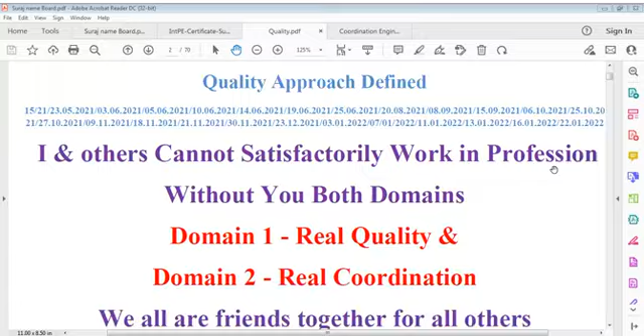So we have to be realistic about this issue, how to deal with that, and we have to deal with quality along with the quality system. We cannot simply say that we keep quality requirement or deliver quality in isolation of the system, and quality of system and product quality both must move together.

We have to rethink, we have to redecide, we have to consider value and quality of product rather than exclusively system quality. A quality system is audited, it is done, but it doesn't prove anything.

To be very frank, it may be whatever, ISO 9000 or Six Sigma or what. If you can't deliver a product, that means there is a fake system, or the persons involved are fake.

I don't blame a particular person, but that point cannot be ignored. The person is fake. Why is that person fake? Because that person is least bothered.

Everybody wants its own way, but what is required is we have to do the work according to whatever is demanded or instructed in the form of specifications or designs. If we can't do that, it means we are not professional or we don't care.

When we say professional, it's a very important word. What I understand is profession means it's a kind of work religion. I consider profession as work religion, not worship religion. It should be treated at that level - it is logical, it is based on facts, it is based on trust, it's based on commitment.

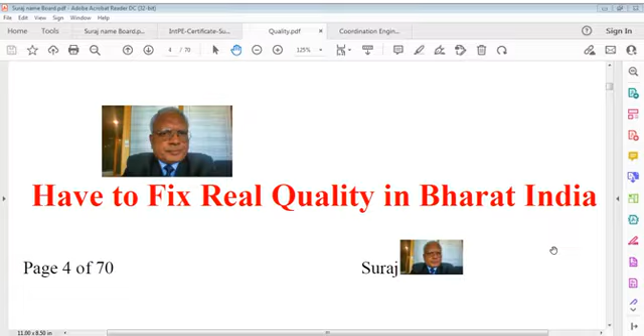So this means we have to consider all this very frequently and very efficiently, and we have to think of how to fix real quality in our country. Come what may, we have no excuses. We can't give any excuse on that. Quality is a requirement and requirement is a mandate. We have to apply it, we have to do it. There is no way we can say, give me concession this time, next time I will let you know. That's not acceptable, because engineering is based on facts and not on fictions.

This is the difference. Engineering is factual, it is real, and then this is delivered, and that delivered product performs. And if it doesn't perform, that project is no product, it's scrap. We say work quality can't be compromised, no way, we can't even think of that. Why to compromise when money is spent, time is spent, and we can apply quality? Why to compromise with that?

That's what is difficult, and we don't depend on a fragile system only. Maybe it is a good system, sound system, but the product should speak - that's what we can say when product speaks. This is a speaking system, speaking quality system or real quality system. Quality system may fail, but product must be delivered qualitatively, and if that is possible, that's the best way, because we can't rely only on a system, because we prepare that system.

Maybe I'm not experienced that much, or we don't have that problem exposure. And we have so many stoppages on the way, so many checkpoints on that, and there are so many existing red lines to be resolved, and we have to resolve them.

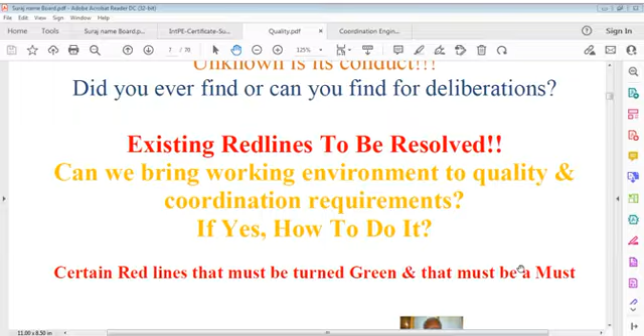Can we bring the working environment to quality and coordination requirement? And how to do that - we have red lines that must be turned green, and many other countries are working around. We have to be better than that, but unfortunately we are the worst. And I'm blaming everyone on this, because we don't have any mindset to be very strongly committed to quality, and that is our weakness.

While other countries are doing that, we can't do that. We take it for granted, or we think, oh, no, it doesn't matter. No system, no method, no quality follow-up, no individual development. They just go on, and particularly in the construction field, it happens so vaguely. Really, it's sometimes ridiculous why we are working at all.

We have to understand coordination. We have to work on required coordination during activities to achieve the defined or expected quality profile on works. If we can't do that, why should we not revisit the whole system? Why should we not revisit quality requirements and specifications that are needed or essential, and update our knowledge and per world working standards?

Why should we not apply work relational coordination requirements? It's a must we have to think of - it's a reliable solution. We have certainly a worsening state of the quality system, a worsening state of quality of work. On how to improve such mandated work quality to certain minimum required marks - that's important.

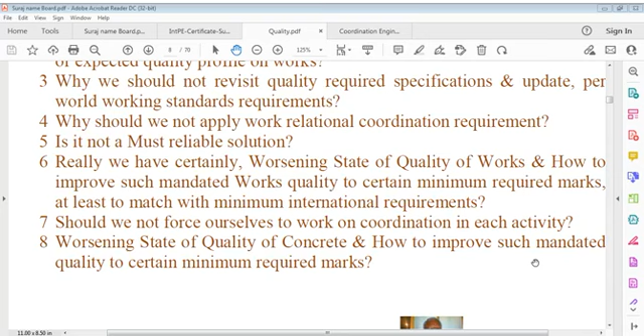Concrete, we say, is a component in construction which amounts to a major percentage of the cost of construction. It becomes incumbent on us to care about the quality of such a component, and that's a very important part. We'll come back to this again because I don't want to waste time on this.

We have a coordination issue. Coordination in engineering is very important for the public as well as for engineers, because it keeps everybody thinking about coordination. If you don't have complete information, there is no way coordination can be done, because coordination has no academic level. It's a practical aspect, it's the practical world of engineering where coordination is learned and taught. And that's the important point.

It means we are a scientific country, or we should be a scientific country. Both are different situations, and we have been missing. We have been missing coordination, and we have been missing good engineering, and that's what we have to think about. And if we can think, I think that's a better way. And there were so many questions I put in. Is coordination engineering a must on every project? We should ask ourselves. And project means what? It's all performance activities involved from pre-design to final completion of construction.

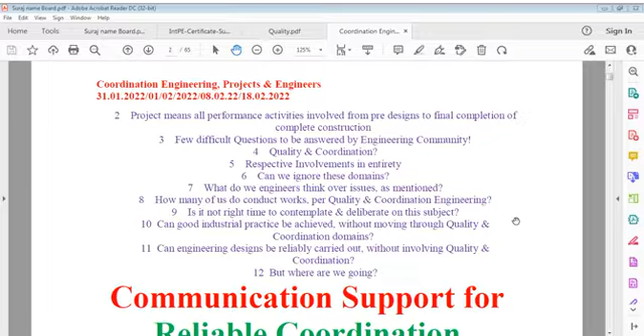There may be some questions to be answered by the engineering community regarding quality and coordination and respective involvement in its entirety. Can we ignore these domains? That's the point we have to answer to ourselves. Can we ignore these two domains? The first domain is quality and the second domain is coordination. Can we ignore them? How many of us conduct work for quality and coordination engineering? Everybody may claim it, but really prove that you work accordingly. That's an important point.

Is it not the right time to contemplate and deliberate on this subject. It's what we're doing, but I'm doing it alone. Nobody is raising any questions so far. And can good industrial practice be achieved without moving through quality and coordination domains? Can engineering design be reliably carried out without involving quality and coordination? And where are we going? There are some projects which I'll look at later on.

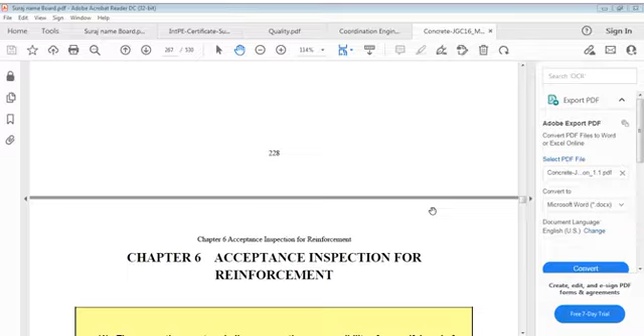Now I open this file on concrete which you're waiting for. That file is a very important one, in which I found the specification. I'll look at it now to see what we did last time, and we'll go there to see the results. Last time we were somewhere here. It was acceptance inspection for reinforcement, and before that, yes, acceptance inspection of concrete. That's what we said, inspection of concrete. And we did all this, and we discussed the commentary, and we discussed what slump is.

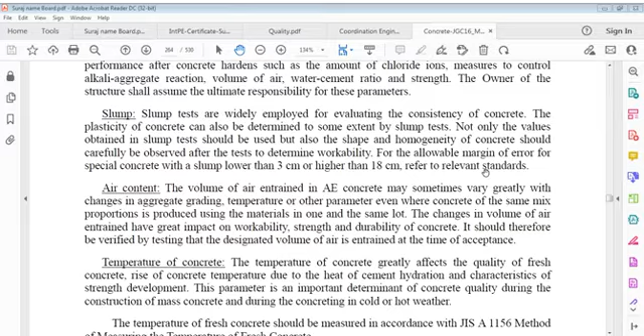Chloride ion content; we start with mass of unit volume. We start with chloride. We discuss it again just for refreshing purposes. Chloride ion concentration greatly affects the resistance to steel corrosion. In cases where a large number of chloride ions are highly likely to intrude into concrete, in cases where sea sand is used, the frequency of testing shall be increased. That's what it says: chloride ion concentration greatly affects that.

What is the temperature now? I don't know what the temperature is. I'm feeling a little cold.

This is the temperature I think is coming. It's now, it says 25 degrees. Indoors should be less than that, and I think that's what it is. 25 degrees, I'm feeling cold. Maybe 10 degrees inside, maybe 20 degrees. So I feel, of course, I should keep my fan off. That will be better, I think, this way. And we have to be serious about this issue.

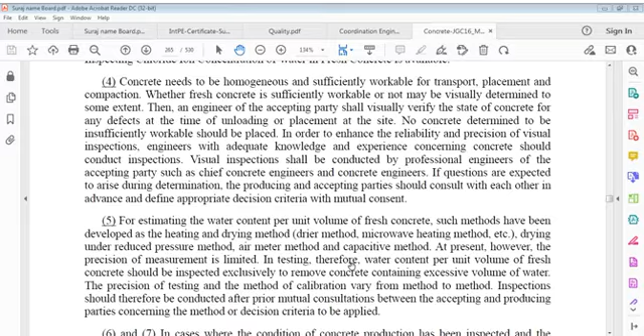For estimating water content per unit volume of fresh concrete, such methods have been developed as heating and drying method, drier method, microwave heating method, drying under reduced pressure method, air meter method and capacitive method. However, precision of measurement is limited. In testing, the water content per unit volume of fresh concrete should be inspected exclusively to remove concrete containing excessive volume of water.

Precision of testing and method of calibration vary from method to method. Inspections should therefore be conducted after prior mutual consultations between parties, engineer and contractor, you may say. In cases where the condition of concrete production has been inspected and quality of concrete materials have been inspected for acceptance, concrete mix proportions may be verified based on printed records of measurements.

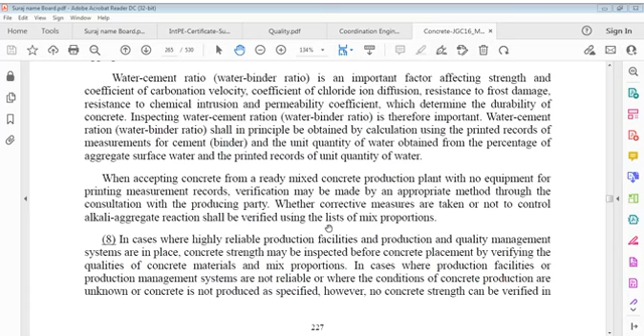In cases where highly reliable production facilities and production and quality management systems are in place, concrete strength may be inspected before concrete placement by verifying qualities of concrete materials and mix proportion. In cases where production facilities or systems are not reliable, or where conditions of concrete production are unknown, or concrete is not produced as specified, however, no concrete strength can be verified in mix proportion inspection. In that case, verification shall be made by strength test after concrete placement.

Shrinkage strain should be measured in accordance with whatever requirements. It should be verified that the measurement does not exceed shrinkage strain of 1000 micrometer.

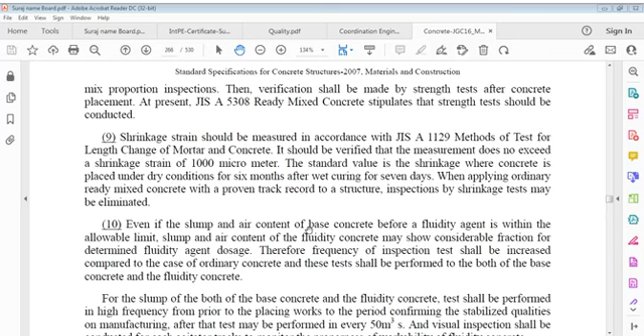Standard value is shrinkage where concrete is placed under dry conditions for 6 months after wet curing for 7 days. When applying ordinary ready-mix concrete with a proven track record to a structure, inspections by shrinkage tests may be eliminated.

Even if slump and air content of base concrete before a fluidity agent is within allowable limit, slump and air content of fluid concrete may show considerable fraction for determined fluidity agent doses. Therefore, frequency of inspection shall be increased compared to case of ordinary concrete, and these tests performed to both of these base concrete and fluidity concrete.

For slump of both base concrete and fluidity concrete, tests should be performed at high frequency from prior to placing works to the period confirming stabilized qualities on manufacturing. After that, tests may be performed every 50 cubic meters, and visual inspection shall be conducted for each agitator truck to monitor properness of workability of fluidity concrete.

It's no doubt that concrete judged not to be in conformity with requirements on results of acceptance test inspection must not be placed. If concrete was already placed into the structure, inspection as of structural concrete must be performed.

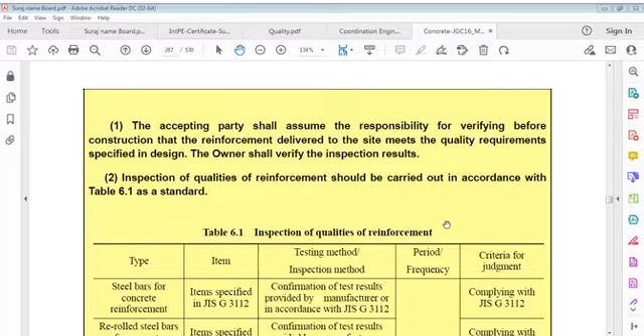Acceptance inspection for reinforcement. The accepting party shall assume responsibility for verifying before construction that reinforcement delivered to site meets quality requirements specified in design. There are steel bar types, then item, testing method, and frequency and period. All of these are generally confirmation of test results provided by manufacturers.

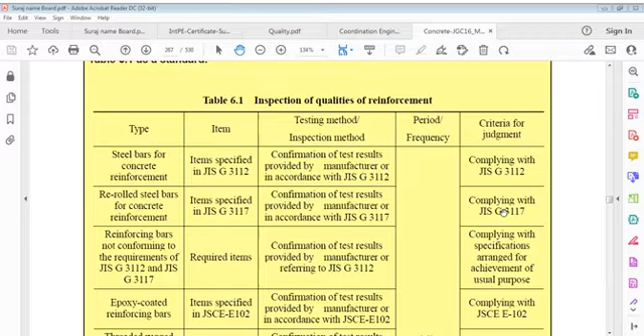Items are steel bars for concrete reinforcement, confirmation of test results provided by manufacturer, and re-rolled steel bars, same applies here. Also reinforcing bars not conforming to requirements, confirmation of test results provided by manufacturer, and epoxy coated reinforcing bars, the same way, and threaded ribbed reinforcing bars with large diameter.

Also pre-stressing wire, pre-stressing strands, pre-stressing bars and pre-stressing steel not conforming to requirements, and rolled steel for general structures, confirmation by manufacturer, rolled steel for welded structures, rolled steel for building structures, as well as steel for structures not conforming to requirements.

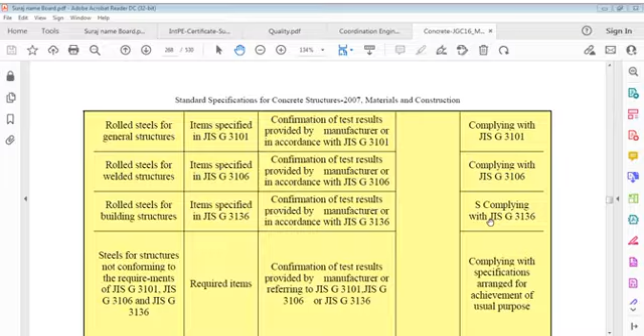Likewise, it is only right and proper that reinforcement possesses required quality as specified for design of structure. Inspection to ensure quality of reinforcement should be performed prior to placing works in advance. The contractor assumes responsibility for conducting acceptance tests. The owner shall verify results.

Reinforcement shipment is generally made to fields directly from factories in form of bundle with manufacturer's certified mill sheet where name or abbreviation of manufacturer, name and type of reinforcement are legibly identified. General inspection should be performed by confirming by visual observation that description and kind are adapted to prescribed reinforcement, and that material properties, shape, size and weight of reinforcement conform to specifications by examining the mill sheet from the product company.

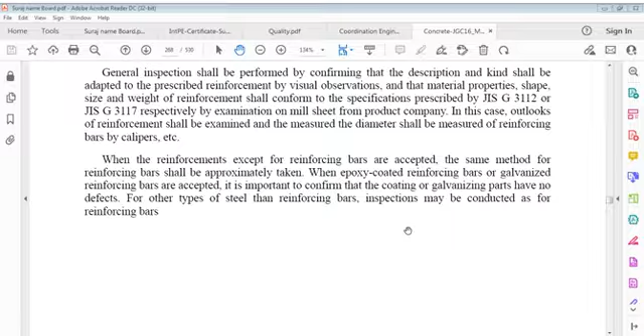In case outlooks of reinforcement are examined, diameter should be measured with calipers. When reinforcements except for reinforcing bars are accepted, the same method as for reinforcing bars should be approximately taken. When epoxy coated reinforcing bars or galvanized reinforcing bars are accepted, it's important to confirm that coating or galvanizing parts have no defects.

For other types of steel than reinforcing bars, inspections may be conducted as for reinforcing bars. Inspection of construction.

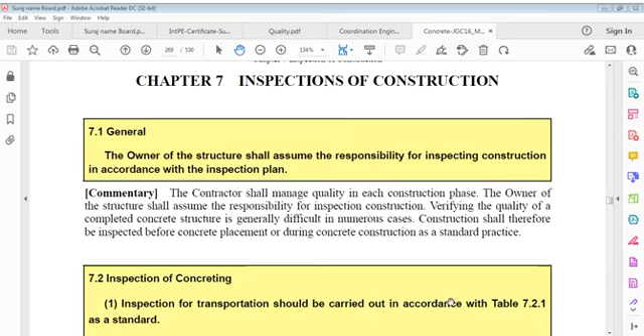The accepting party shall assume responsibility for inspection. We are saying engineer in place of owner because the engineer works on behalf of owner and is responsible on behalf of owner. Here we say engineer as though we say owner, and owner is the owner of responsibility. Contractor shall manage quality in each construction phase.

Owner of a structure shall assume responsibility for inspection and shall verify quality of complete structure. It's difficult in numerous cases. Construction shall therefore be inspected before concrete placement or during concrete construction as standard practice. Inspection for transportation should be carried out. Let us see what it says.

Item is equipment and workers required for transportation, per construction plan, with confirmation by visual observation, because it is transportation, method of transportation, and we have to follow construction plan in every case. Quantity of transportation, confirmation of quantity as prescribed, and all these items regarding method of transportation and quantity, prior to placing work and during transport.

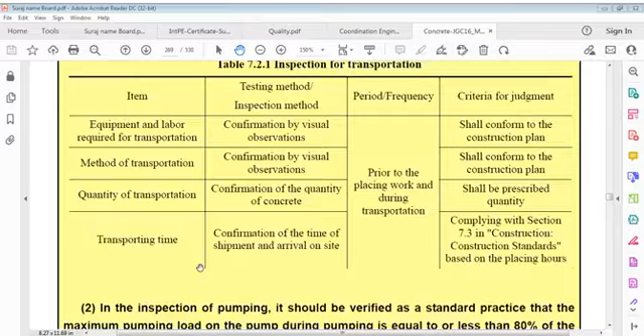Transportation time, confirmation of time of shipment and arrival on site. That is construction standards based on placing. In inspection of pumping, it should be verified as a standard practice that maximum pumping load on pump during pumping is equal to or less than 80% of maximum theoretical pumping.

Now, inspection of casting, that is equipment and workers required, method of placement and quantity of placement. Confirmation by visual observation, shape and size, that is quantity of placement, confirmation of quantity from shape and size of placing zone, and all shall be done according to construction plan and quantity.

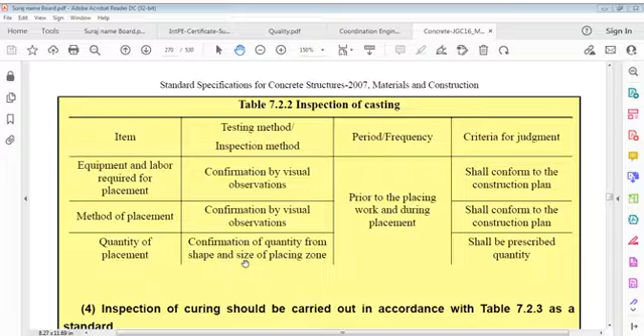Inspection of curing should be carried out in accordance, and this should be same equipment and workers, equipment and labor, method of curing and period of curing. All we have to say, which says equipment and labor requirements observation, and again we say construction plan, we should have ultimately this plan. In cases where inspection for transportation, placing or curing of concrete before construction shows non-compliance with required standards,

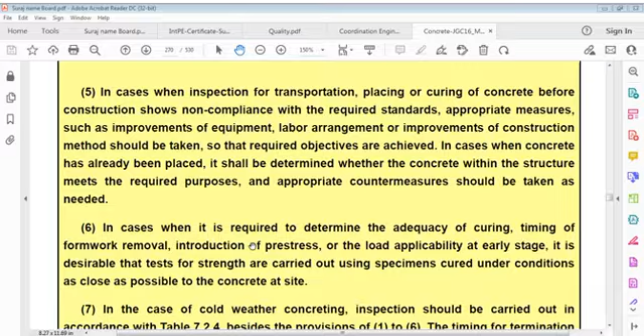appropriate measures such as improvements of equipment, worker arrangement, or improvements of construction method should be taken so that required objectives are achieved. In cases when concrete has already been placed, it shall be determined whether concrete within structure meets required purpose, and appropriate countermeasures should be taken.

In cases where it is required to determine adequacy of curing, timing of formwork removal, introduction of pre-stress, or load applicability at early stage, it's desirable that tests for strength are carried out using specimens cured under conditions as close as possible to site conditions.

In case of cold weather, inspection should be carried out in accordance with requirements. Timing of termination of curing, formwork removal and shoring should be determined on basis of strength of specimen cured under conditions as close as possible to site conditions, or on basis of strength estimated using records of temperature of the concrete. And now site inspection of cold weather concrete: it says circumferential temperature, concrete temperature, and concrete temperature curing.

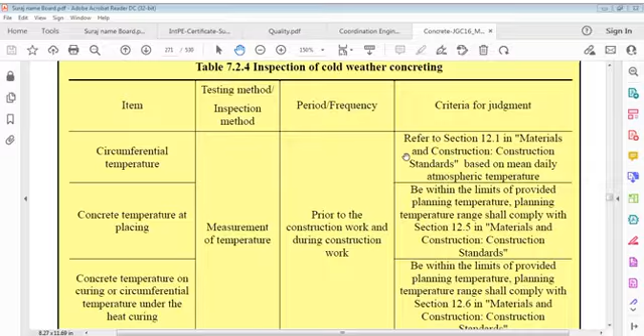So we have to do all this according to standards, and we go to inspection of hot weather concrete. Inspection of hot weather concrete is circumferential temperature, concrete temperature, placing and transportation time. All these have been discussed, and we have gone through. Let's discuss circumferential temperature and concrete temperature. Placing is a measurement of temperature, and that's prior to construction work.

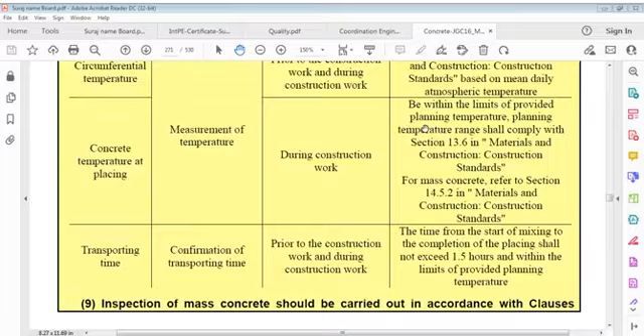During construction, we can say concrete temperature placing. We have to see material, construction, and limits are provided by temperature. It's very important where the limits are that's required here. Transporting time: confirmation of transporting time prior to construction work and during construction work. Time from start of mixing to completion of placing shall not exceed 1.5 hours, and within a limit of provided planning.

Inspection of mass concrete should be carried out in accordance with this clause. For mass concrete, temperature and placing is very important. It says measurement of temperature and frequency during construction work shall comply with the requirements of provided plan. Concrete temperature on curing and circumferential temperature under temperature control curing.

In inspections of concrete transport and placement, types, models, capacities and quantities of transport and placement facilities, human resources assigned, transport channels to site, methods of transport at site, sections of concrete placement, locations of construction joints, and order and speed of placement shall be verified for compliance with construction plan.

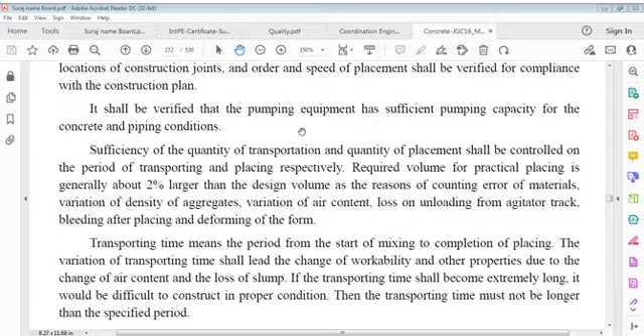It should be verified that pumping equipment has sufficient pumping capacity for concrete and piping condition. Sufficiency of quantity of transportation and quantity of placement should be controlled on period of transporting and placing respectively. Required volume for practical placing is generally about 2% larger than design volume for reasons of counting error of materials, variation of density of aggregates, variation of air content, loss on unloading from agitator truck, bleeding after placing and deforming of form.

Transporting time means period from start of mixing to completion of placing. Variation of temperature and variation of transporting time lead to change of workability and other properties due to change of air content and loss of slump. If transportation time becomes extremely long, it will be difficult to construct in proper condition.

Transportation time means the period from start of mixing to completion of placing. Variation of transportation time leads to change of workability and other properties due to change of air content and loss of slump. If transporting time becomes extremely long, it would be difficult to construct in proper condition. Transporting time must not be longer than specified.

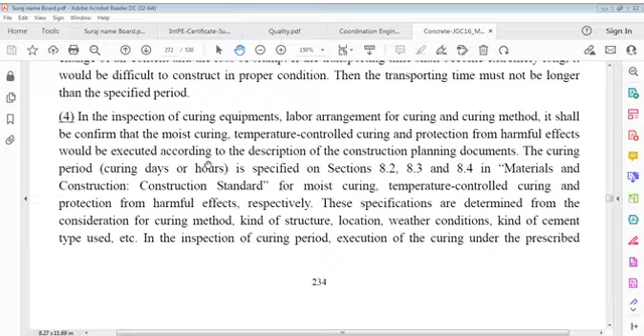Curing period in materials and construction standards for moist curing, temperature control curing and protection from harmful effects respectively. These specifications are determined from consideration for curing method, kind of structure, location, weather conditions, kind of cement, types used. For curing, inspection of curing period, execution of curing under prescribed condition would be confirmed.

In cases where concrete is found to be unacceptable as a result of inspection of transport, placement and curing facilities and construction plan are considered unsatisfactory, facilities should be improved and construction plan should be reviewed. In cases where structure has been completed, it should be verified that structure meets designated performance requirements. Inspection should be conducted during construction and improvement should be made immediately. Measures as preventive as possible should be taken.

In order to estimate adequacy of curing, appropriate time for form removal and pre-stressing or to ensure safety of structure under working conditions, real concrete strength in structure must be estimated in some cases. For this purpose, concrete test specimen shall be cured under conditions as close to field conditions as possible. In cold weather concrete works the above mentioned specification is extremely important.

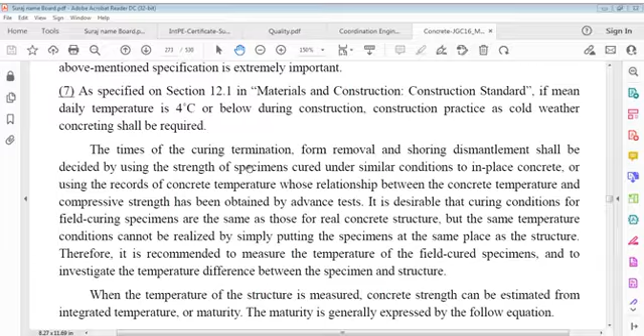In materials and construction standards, if mean daily temperature is 4 degrees Celsius or below, during construction practice, cold weather concreting shall be required. Times of curing termination, form removal and shoring dismantling shall be decided by using strength of specimen cured under similar conditions to in place concrete, or using record of concrete temperature whose relationship between concrete temperature and compressive strength has been obtained.

It is desirable that curing conditions for field curing a specimen are the same as those for the real concrete structure, but the same temperature conditions cannot be realized by simply putting the specimen at the same time at the same place as the structure. It is recommended to measure temperature of field cured specimen and to investigate temperature difference between specimen and structure.

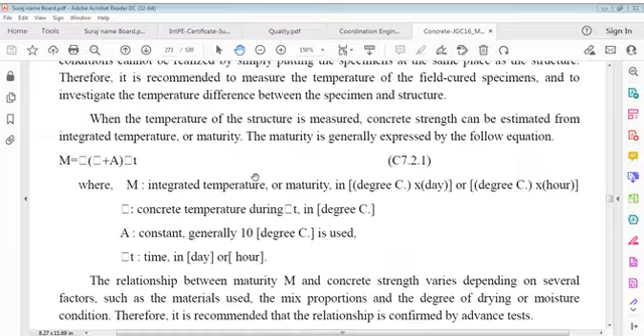So we have this equation. We also discussed this integrated temperature. All this we have gone through. Relationship between maturity M and concrete strength varies depending on several factors such as material used, mix proportion and degree of drying or moisture conditions. Now what to do? That relationship is confirmed by advance tests.

Concrete considered as hot weather is prescribed, considered as cold weather, mass concreting also there. We have the principle of reliable thermal cracking control in mass concrete. The principle of reliable thermal cracking control in mass concrete is to evaluate temperature or thermal stress of structure in advance.

However, in actual practice, due to complicated influence of many uncertain factors at construction stages, behavior of structure may often differ from prediction, no matter how detailed tests or advanced analysis are conducted at planning stage. In mass concreting, it is necessary to measure concrete temperature of structure continuously from time of placing to time when temperature of concrete becomes nearly equal to atmospheric temperature, and examine whether temperature changes are kept within range predicted in advance.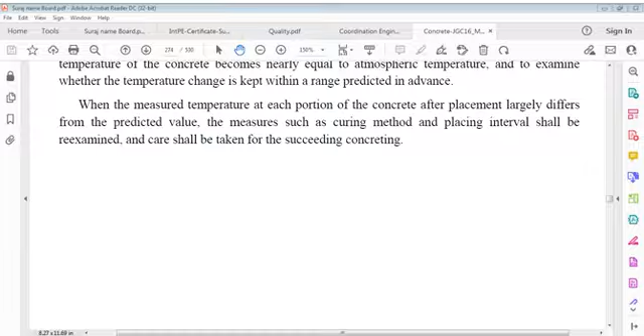Now we go to inspection of reinforcement. Inspection of fabrication and assembly of reinforcement we have to discuss. When inspection results reveal that fabrication and assembly of reinforcement parts are not in conformity with requirement, works for fabrication and assembly of reinforcement parts shall be modified. Items, testing method or inspection method, period you can see, and criteria for judgment.

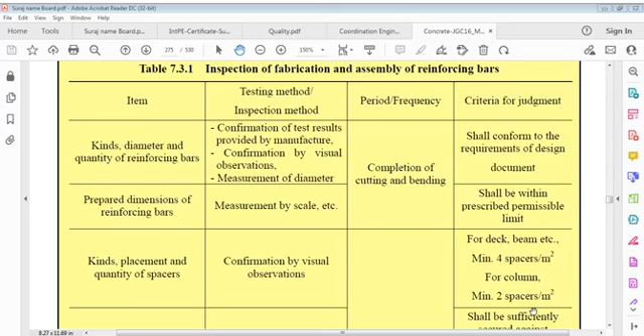Item is kinds, diameter and quantity of reinforcing bars. Other is prepared dimension of reinforcing bars. Kinds, placement and quantity of spacers and fixing method of arrangements of bars. Kinds, diameter and quantity: confirmation of test results and by visual observation. Then measurement by scale for prepared dimensions and confirmation by visual observation.

And here is completion of cutting and bending, specifying diameter, and all should conform to designs' prescribed limits. Or, as we said, 4 spacers per square meter, and this is what we have to think about.

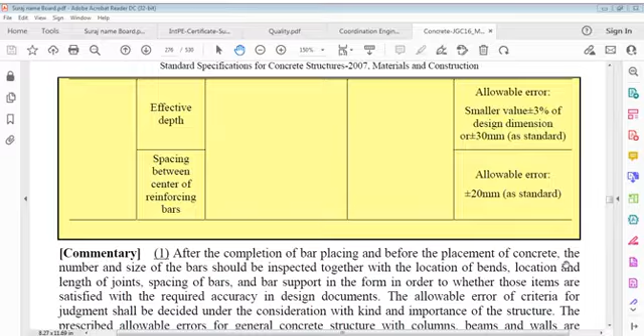Arrangement of assembled reinforcing bars, that is arrangement and length of joint and anchorage, and concrete cover, must conform to design requirements. Cover must be verified for durability. Effective depth has an allowable error of plus minus 3% of design dimensions.

Spacing between centers of reinforcing bars has an error of plus minus 20 mm. After completion of bar placing and before placement of concrete, the number and size of bars should be inspected, together with location of bends, location of length of joints, and spacing accuracy as shown in design documents. Allowable error criteria for judgment shall be decided considering the kind and importance of structure.

Prescribed allowable errors for general concrete structures with columns, beams, and walls are expressed. It is advisable to make as many inspections as possible during placing of reinforcing bars.

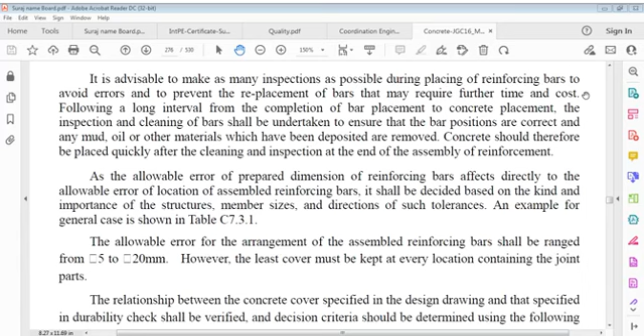Allowable error for arrangement of assembled reinforcing bars shall be from 5 to 20 mm. However, the least cover must be maintained at every location, including joint parts. The relationship between concrete cover specified in drawings and that specified in the durability check shall be verified, with decision criteria determined using the equation: measured concrete cover (cm) must be greater than specified concrete cover (cd).

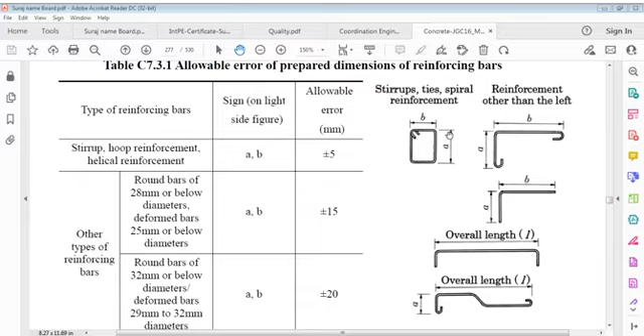This we had discussed now - allowable error in prepared dimensions, which we also discussed. Allowable error in prepared dimensions of reinforcing bars, such as stirrups and hoops, is plus minus 5 mm. For round bars 28 mm or below diameter, and deformed bars 25 mm or below diameter, the error is plus minus 15 mm.

When inspection results judge that preparation and assembly of reinforcing bars was not in conformity with requirements, it shall be modified properly. For bent reinforcing bars, rebending shall not be undertaken in principle, as it may harm the quality of the bars.

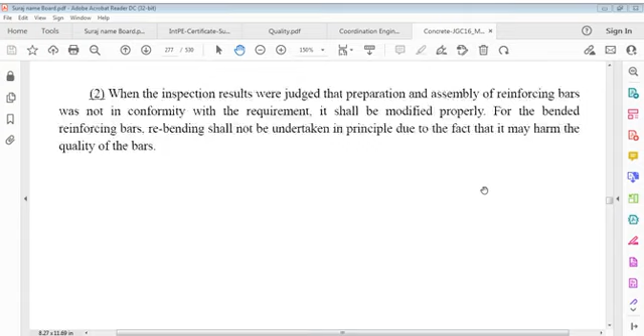Inspection of joints of reinforcing bars. When connecting reinforcing bars using gas welded joints, welding joints, or mechanical joints, the strength of the joint should be examined before use. Inspection of joints of reinforcing bars should be carried out in accordance with the table.

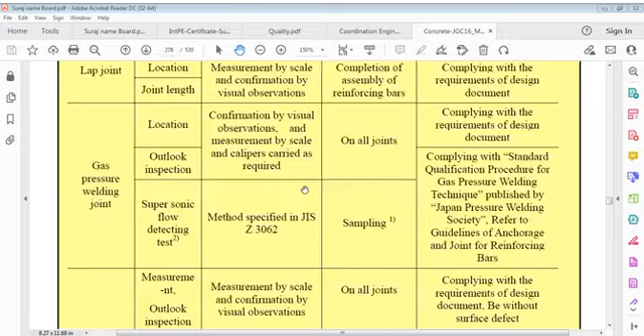Guidelines of anchorage and butt arc welded joints: measurement, outlook inspection, detailed outlook inspection, measured by scale or confirmation with calipers and others, on all joints, more than 5% sampling, complying with requirements of design, without surface defects, eccentricity not more than 1/10 of bar diameter.

Eccentricity not more than 1/10 of bar diameter. Slope of joint parts not more than 1/10 of measured length.

For details of guidelines of anchorage and joint of bars, the supersonic flow detecting test method specifies more than 20%, more than 30% samples, following guidelines for anchorage and joint.

Mechanical joint inspection tests shall be executed with consideration given to the type of joint method. One inspection lot is assumed with pressure welding parts from the same working party.

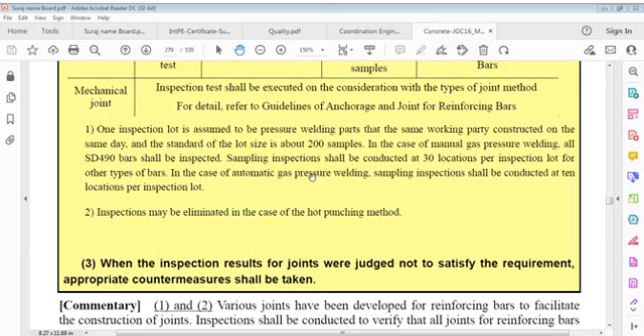Inspections may be eliminated in case of hot punching method. When inspection results for joints were judged not to satisfy requirements, appropriate measures shall be taken. Various joints have been developed for reinforcing bars to facilitate construction of joints.

Inspections shall be conducted to verify that all joints for reinforcing bars meet designated performance requirements. Gas welding joints include manually gas welded joints, automatically gas welded joints, and hot punching gas welded joints. Welded joints include butt arc welded joints, stud welded joints, butt resistance welded joints, and flare welded joints. Mechanical joints include crimped sleeve joints, threaded joints, threaded deformed bar joints, mortar grouted joints, friction welded joints, and other types of joints.

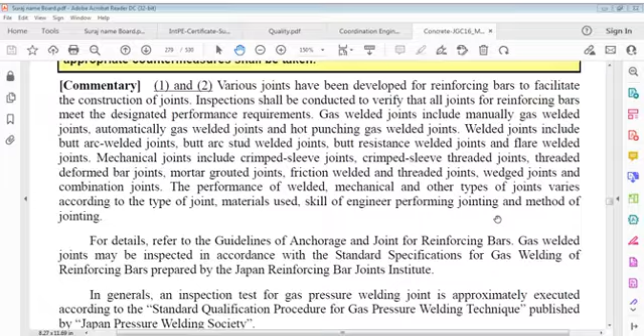In general, inspection tests for gas pressure welding are executed approximately as described. When judgment does not comply with the specifications, measures shall be performed according to recommendations by the standard qualification.

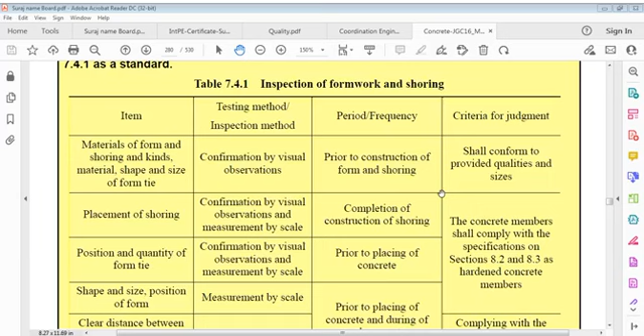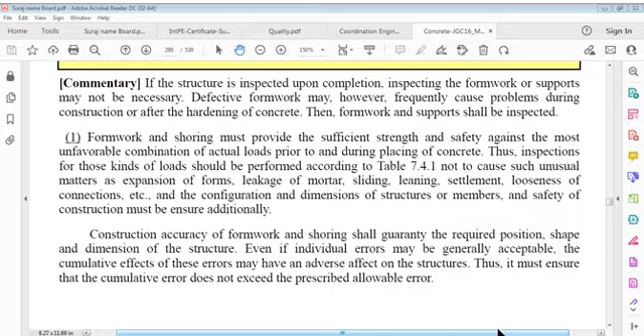If a structure is inspected upon completion, inspecting formwork or support may not be necessary. Defective formwork may, however, frequently cause problems. During construction or after hardening of concrete, formwork and support shall be inspected.

Formwork and shoring must provide sufficient strength and safety against the most unfavorable combination of actual loads prior to and during placing of concrete. Thus, inspections for those kinds of loads should be performed so as not to cause such unusual matters as expansion of forms, leakage of mortar, sliding, leaning, settlement, looseness of connection, etc.

The inspections for those kinds of loads should be performed not to cause such unusual matters as expansion of forms, leakage of mortar, sliding, leaning, settlement, looseness of connections, and changes in configuration dimensions of structure or members. Safety of construction must be ensured.

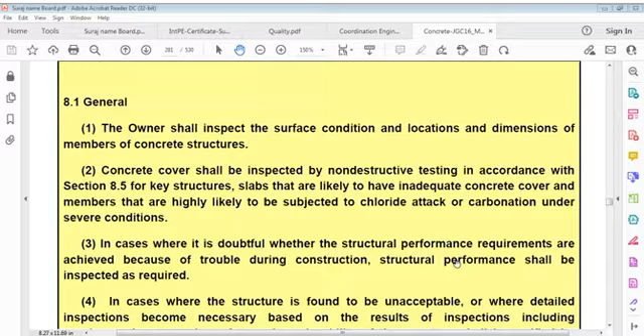Concrete cover shall be inspected by non-destructive test methods we discussed, as slabs are likely to have inadequate concrete cover in members highly likely to be subjected to chloride attacks. Inspection is also required when it is doubtful whether structural performance requirements are achieved because of trouble during construction, and in cases where the structure is found to be unacceptable or where detailed inspections become necessary based on results of inspections, including non-destructive testing.

In cases where it is doubtful whether structure performance requirements are achieved because of trouble during construction, structure performance shall be inspected as required. Where structure is found unacceptable, or where detailed inspections become necessary based on results of inspections including non-destructive tests, safety and serviceability of structures shall be verified.

Concrete structure should be constructed as initially planned, within allowable range, if it is to meet designated performance requirements. The owner who accepts it should assume responsibility for conducting inspections to verify whether surface condition is satisfactory, and whether location, shape and dimensions of the structure are within allowable range.

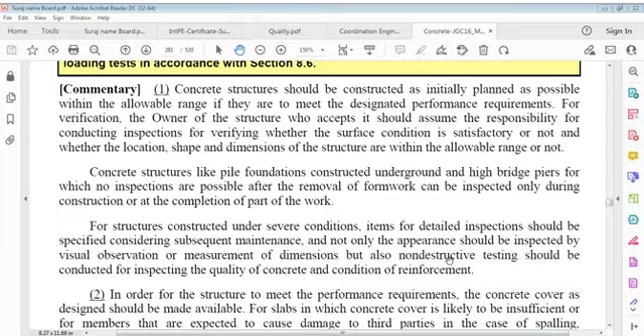Concrete structures like pile foundations constructed underground and high bridge piers, for which no inspection is possible after removal of formwork, can be inspected only during construction. For structures constructed under severe conditions, items for detailed inspections should be specified considering measurement and subsequent maintenance. Not only appearance should be inspected through visual observation or measurement of dimensions, but non-destructive testing should also be conducted for inspecting the quality of concrete.

In order for the structure to meet performance requirements, concrete cover as designed should be made available. For slabs in which concrete cover is likely to be insufficient, or for members expected to cause damage to third parties, or members likely to be subject to steel corrosion due to chloride attack or carbonation, non-destructive testing should be conducted.

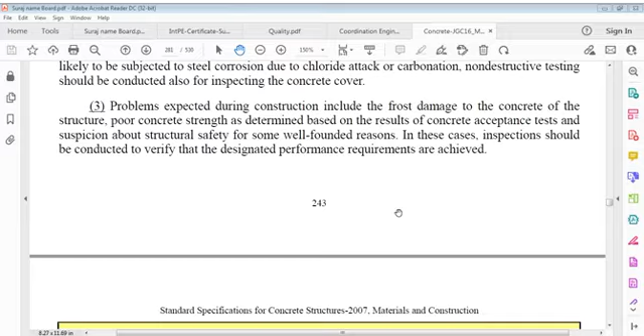Expected issues during construction include frost damage to concrete of the structure, poor concrete strength as determined based on results of concrete acceptance tests, and suspicion of structural safety for some well-founded reasons. In those cases, inspection should be conducted to verify that designated performance requirements are achieved.

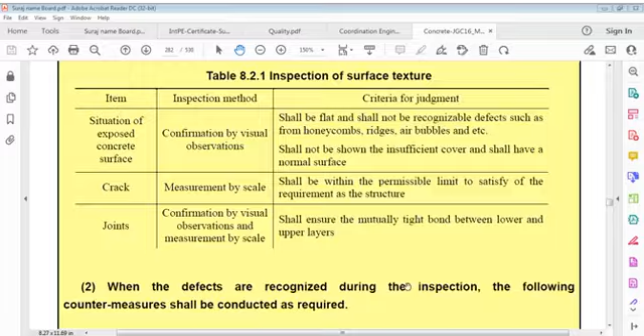When defects are recognized during inspection, countermeasures shall be taken. Defects on the concrete structure surface, such as abrupt bulges and ridges, shall be removed to flatten the surface. Other surface imperfections such as honeycombs and fractured portions shall be removed and repaired. Initial cracks larger than allowed shall be repaired properly.

In the case of mass concrete, besides inspection carried out as stipulated, inspection of thermal cracks shall be conducted by visual observation after removal of formwork. Timing of inspection of thermal cracks shall be decided taking into account temperature change in the structure. When inspection points out harmful cracks, adequate countermeasures shall be taken. When repair is necessary, appropriate measures, materials and methods shall be selected so as to satisfy the requirements of the structure.

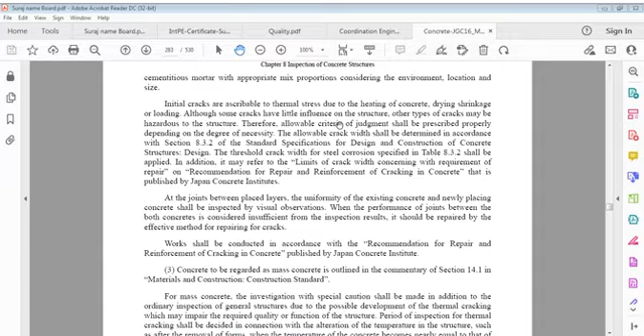So let us continue. I left off somewhere here, and we were talking about inspection of surface texture. Inspection of surface texture shall be performed prior to undertaking measures such as repair or refinishing. We have to either repair or refinish.

It is important to inspect the surface just after removal of formwork and curing. Visual inspection for surface defects such as cold joints, honeycomb, ridges, abrupt bulges, bubbles and different tones of color shall be conducted by visual observation. Also inspected are locations where reinforcing bars have been visibly exposed, or where the shapes of reinforcing bars are clearly recognized due to insufficient concrete cover even before reinforcing bars have been exposed.

Prior to repair, examination of the in-service environment, location and status of defects shall be performed. Repair should be applied while implementing adequate quality system programs so as to eliminate the need for repair in the maintenance phase. Initial cracks arise from thermal stresses due to heating of concrete and drying shrinkage. Although some cracks have little influence on the structure, other types of cracks may be more hazardous to structures than others. Therefore, criteria of judgment shall be prescribed, and allowable crack width shall be determined.

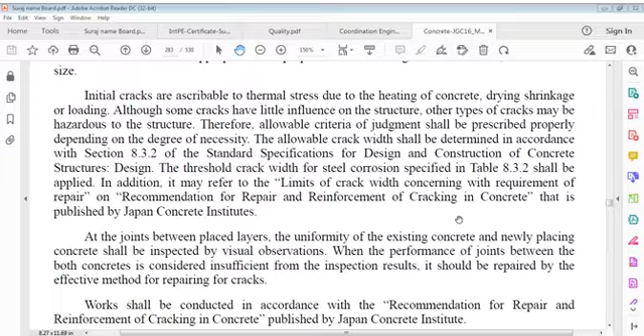And likewise, we have to see all these concrete to be regulated regardless of mass concrete specified herein. Joints between placed layers, and uniformity of existing concrete and newly placed concrete, shall be inspected. Everything has to be inspected upon removal of the shutters. And when performance of the joint between both concretes is considered insufficient from results, it should be repaired.

Mass concrete investigation with special caution shall be conducted in addition to ordinary inspection of general structures due to possible development of thermal cracking, which may impair required quality or function of structures. Period of inspection for thermal cracking shall be decided in connection with alteration of temperature in the structure, such as after removal of forms, when temperature of concrete becomes nearly equal to that of atmosphere, and when average temperature of member becomes lowest during winter.

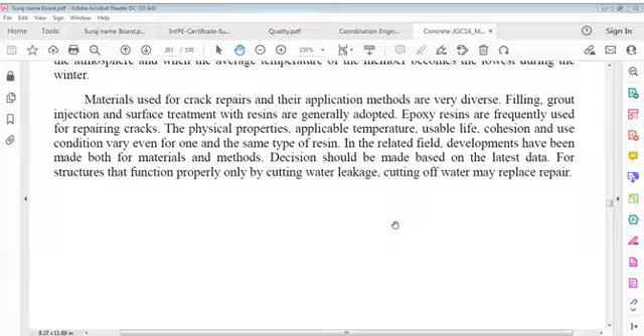Materials used for crack repairs and their application methods are very diverse. Filling, grout injection and surface treatment with resins are generally adopted. Epoxy resins are frequently used for repairing cracks. Physical properties, applicable temperature, usable life, cohesion and use condition vary even for one and the same type of resin. Developments have been made both in materials and methods. Decisions should be made based on latest data. For a structure that functions properly only by cutting water leakage, cutting off water may replace repair.

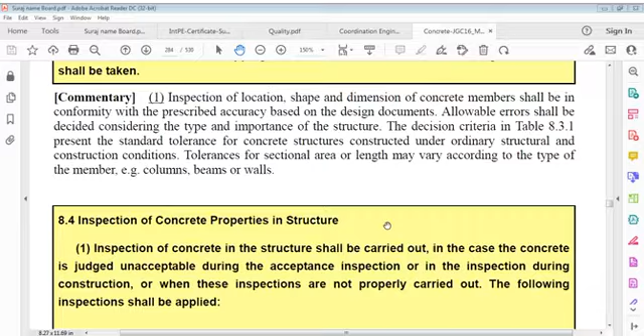Inspections of location and dimension of concrete members: plane position allowable error is plus minus 30 mm, and height in designs 50 mm. We already discussed this. Inspection of location, shape and dimension of concrete members shall be in conformity with prescribed accuracy. Allowable errors shall be decided accordingly, considering types and importance of structures.

Inspection of concrete properties in structures shall be carried out in case of concrete which is unacceptable during acceptance inspection, or inspection during construction when these inspections are not properly carried out. Tests on specimens taken at delivery and subject to same conditions as structures, tests on specimens taken from structures, and non-destructive tests will be applied. In case inspection evokes suspicion of performance of structure, tests shall be conducted to comprehensively judge structural performance from various aspects, combining non-destructive tests, tests on drilled cores or sawn beams, and loading tests on structures.

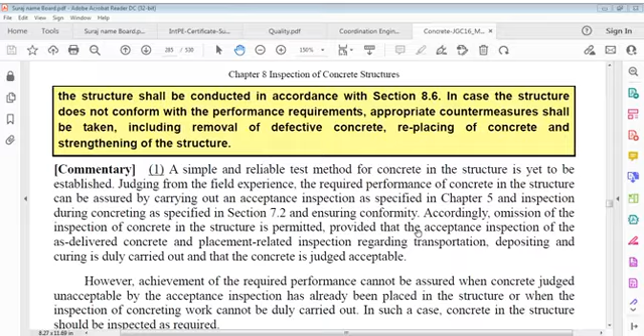Loading tests for safety and serviceability of structures shall be conducted accordingly. In case the structure does not conform with performance requirements, appropriate countermeasures shall be taken, including removal of defective concrete, replacing of concrete, and strengthening of structure. A simple and reliable test method for concrete and structures is to be established. Judging from field experience, required performance of concrete structure can be assured by carrying out acceptance inspection and inspection during concreting as specified, and ensuring conformity accordingly.

Omission of inspection of concrete is permitted provided that acceptance inspection of as-delivered concrete and placement-related inspection regarding transportation, deposition and curing is duly carried out. However, achievement of required performance cannot be assured when unacceptable concrete has already been placed in the structure, or when inspection of concrete work cannot be duly carried out. In such a case, the concrete structure shall be inspected as required.

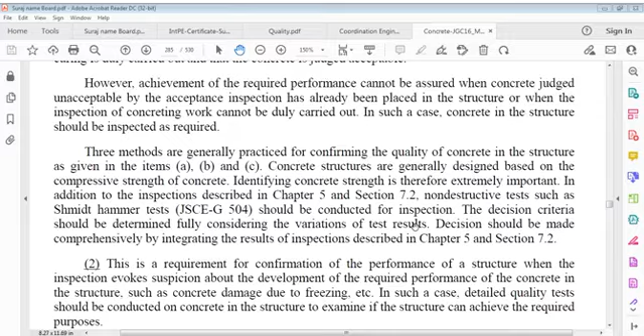Three methods are generally practiced for confirming quality. Concrete structures are generally designed based on compressive strength of concrete. Identifying concrete strength is therefore extremely important. Non-destructive tests such as rebound hammer tests should be conducted for inspection. Decision criteria should be determined fully considering variations of test results. Decisions should be made comprehensively by integrating results of inspections.

This is a requirement for confirmation of performance of the structure, when inspection evokes suspicion about development of required performance of concrete structures, such as concrete damage due to freezing. In such a case, detailed quality tests should be conducted on the concrete structure to examine if the structure can achieve required purposes. Test methods include non-destructive tests such as rebound hammer tests and ultrasonic testing, tests using concrete specimens, cores or beams cut from structure, tests for surface air permeability, tests for estimating concrete mix proportions, and loading tests.

Qualities of concrete in structure may not be accurately judged by a single test method. Multiple tests should be combined to make a comprehensive judgment. When test results indicate performance requirements of structure are not fulfilled, appropriate measures should be taken, including strengthening of structure.

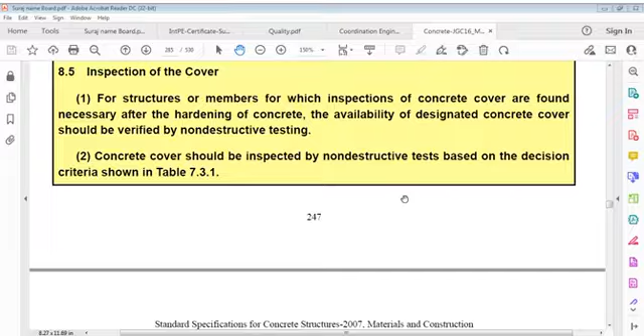Inspection of cover for structures or members of which inspection of cover is found necessary after hardening of concrete: availability of designated concrete cover should be verified by non-destructive testing. If concrete cover is found unacceptable from the results of the inspections, comparison shall be made among such methods as chipping and reconstruction of concrete and application of protective measures. Though cover is investigated at time of inspection of fabricated reinforcement, cover can depend on degree of securing of formwork.

Concrete cover of a completed structure should be measured by such non-destructive testing methods as electromagnetic induction, electromagnetic wave reflection, and radiography for important structural members, members that are likely to be subject to steel corrosion under severe conditions, and members that greatly affect third parties.

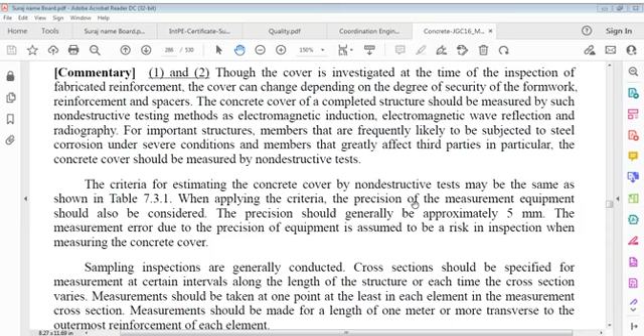Cross-sections should be specified for measurement at certain intervals along the length of the structure, each time the cross-section varies. Measurement should be taken at one point at least in each element in the measurement cross-section. Measurement should be made for a length of 1 meter or more.

For a structure in which concrete cover is found insufficient as a result of sampling inspections, detailed investigation should be done. Insufficient cover reduces performance of concrete to protect steel reinforcement; this requirement was established to ensure performance. Loading tests of members and structure: the important point is the load.

In case where the structure is considered unacceptable in inspections conducted before completion of the structure, or a verification of structural performance is considered necessary because of well-founded suspicion about performance of a structure, performance of the structure should be verified by confirming safety and serviceability of the structure or members by loading tests. Method of loading shall be determined in order to certainly examine required performance.

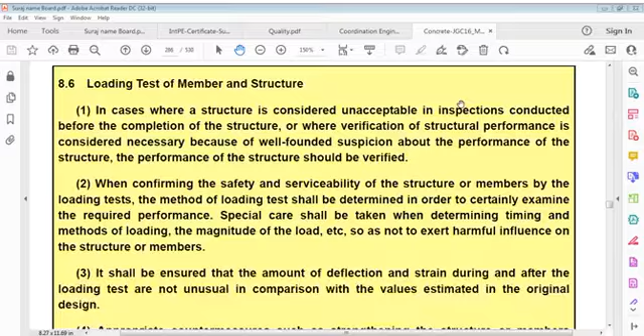Special care should be taken when determining timing and methods of loading, magnitude of load, etc., so as not to exert harmful influence on the structure or members. It shall be ensured that the amount of deflection and strain during and after loading tests are not unusual in comparison with values estimated in the original design.

Appropriate countermeasures such as strengthening of the structure or members shall be taken in case safety and serviceability of the structure or members are probably insufficient. When confirmation by load test shall be performed, it should be considered confirming tests for performance of elements such as members and loading tests of the structure. In application of test results, special attention is required to the fact that performance assessed in loading tests is generally limited to part of elastic behavior.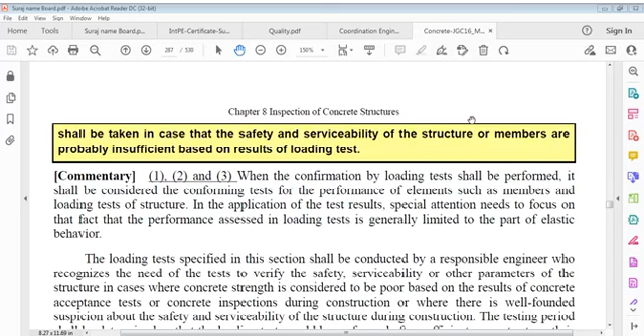Load tests specified in this section shall be conducted by a responsible engineer who recognizes the need of tests to verify safety, serviceability or other parameters of the structure in cases where concrete strength is considered to be poor based on results of concrete acceptance tests or concrete inspections during construction, or where there is well-founded suspicion about safety and serviceability of the structure.

During construction, the testing period shall be determined so that the loading test could be performed after sufficient concrete strength is attained, so that introduction of weak spots on the structure due to early application of load can be avoided. In case a new construction method or special material is adopted during construction of structures, the load test method shall be as prescribed in construction specifications.

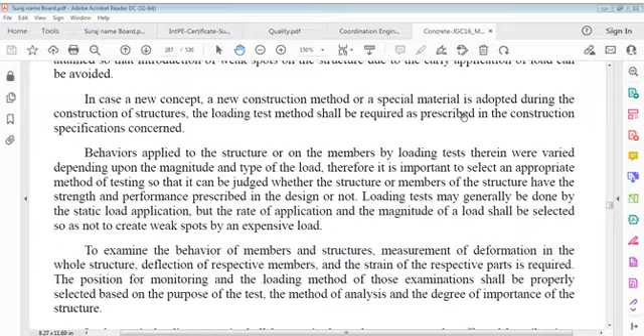Behaviors of the structure or members under loading tests vary depending upon magnitude and type of load. It is important to select an appropriate method of testing so that it can be judged whether the structure or members have the strength and performance prescribed in design or not. Loading tests may generally be done by static load application, but rate of application and magnitude of load shall be selected so as not to create weak spots by an excessive load.

To examine behavior of members and structures, measurement of deformation in the whole structure, deflection of respective members and strain of respective parts is required. Positions for monitoring and load method of those examinations shall be properly selected based on purpose of test, method of analysis and degree of importance of the structure.

In a static loading test, care shall be taken not to be affected by vibration, impact or other dynamic movement. Measurement errors that are largely affected by atmospheric temperature change during the test shall be kept as small as possible, or an adjustment of errors in test results shall be prepared in advance. Cracking that may exert harmful effects on strength and durability of the structure.

Notably large residual deformations or other cracking that may exert harmful effect on strength and durability of the structure, or other defects in the structure, must be carefully observed, not only during but also after the test. In addition, propriety of the test method shall be confirmed together with performance of the structure.

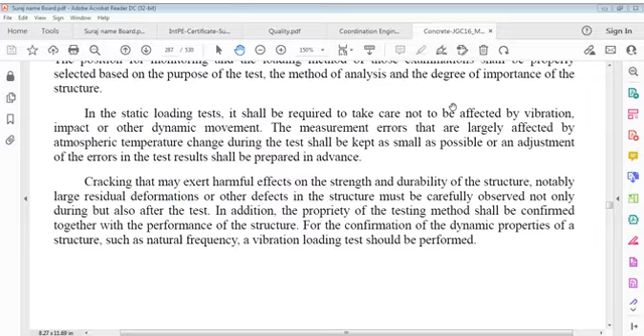For confirmation of dynamic properties of the structure such as natural frequency, a vibration load test should be performed. Records.

Results of inspection of concrete structure shall be organized and stored. Inspection records, if repair, renovation, or other corrective measures are taken based on results of inspection: reasons, locations and range, and materials used shall also be recorded. Results of inspection conducted

Results of inspection conducted before the structure is put into service serve as initial values in inspections. In maintenance of the structure, performance requirements for concrete structures in such terms as durability, safety, serviceability, and restorability should be met throughout its design useful life. Inspection results for concrete structures are important data for identifying initial conditions of the structure for maintenance, preparing inspection and investigation plans, and analyzing progress of alteration.

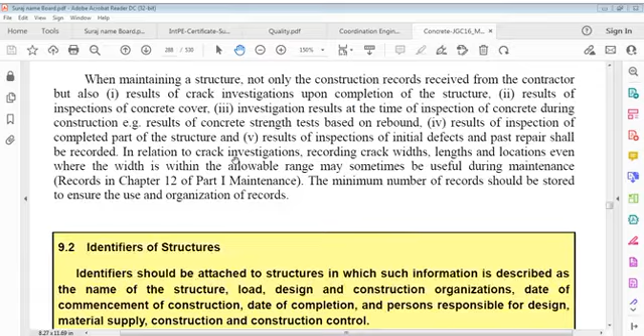When maintaining a structure, not only construction records received from the contractor, but also results of crack investigations upon completion of the structure, results of inspection of concrete cover, investigation results of concrete at the time of inspection during construction, results of concrete strength tests based on rebound, results of inspection of the completed part of the structure, and results of inspections of initial defects and past repair shall, if width is within allowable range, sometimes be useful during maintenance. A minimum number of records should be stored. Identifiers of structures.

The identifier should be attached to structures in which such information is described as name of structure, load design and construction organizations, date of commencement of construction, date of completion, and persons responsible for design, material supply, construction and construction controls. Specifying names of the chief design engineer and persons responsible for construction and construction organization is explicitly defining the position of respective engineers and paying tribute to engineers engaged in construction work. It is expected to contribute to improvement of durability of the structure and also improvement to maintenance.

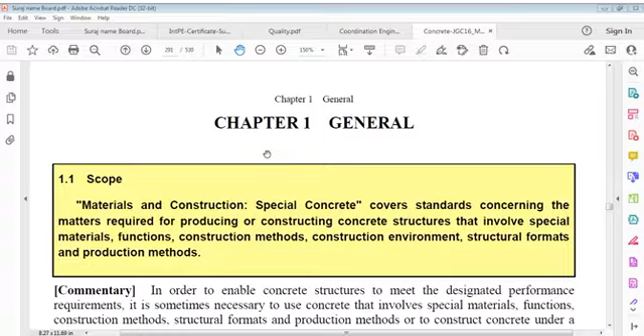Materials and construction: special concrete covers standards concerning matters required for producing or constructing concrete structures that involve special materials, functions, construction methods, construction environment, structural formats, and production methods. In order to enable concrete structures to meet designated requirements, it is sometimes necessary to use concrete that involves special materials, functions, construction methods, structural formats, and production methods, or to construct concrete under a special construction environment.

Materials and construction: special concrete presents standards concerning matters required for producing or constructing special concrete. Concrete that uses special materials and provides special functions includes expansive cement concrete, lightweight aggregate concrete, concrete using continuous fiber reinforcing materials, short fiber reinforced concrete, and high strength concrete. Concrete that's constructed by a special method includes high fluidity concrete, shotcrete, and pre-packed concrete. Concrete that's constructed under a special environment includes underwater concrete and offshore concrete.

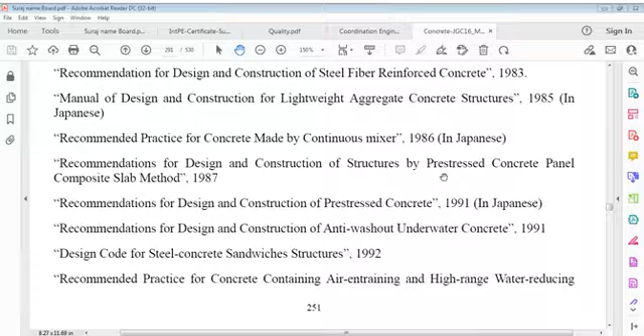Then we can say special materials. Where special materials, methods and types of construction are not sufficiently stipulated in the specification, the following guidelines have to be followed: recommendations for design and construction of steel fiber reinforced concrete, manual of design and construction of lightweight aggregate concrete, recommended practice for concrete made by continuous mixer, recommendations for design and construction of pre-stressed concrete structures, recommendations for design and construction of anti-washout concrete and steel concrete sandwich structures, and practice for concrete containing air-entraining and high range water-reducing agents.

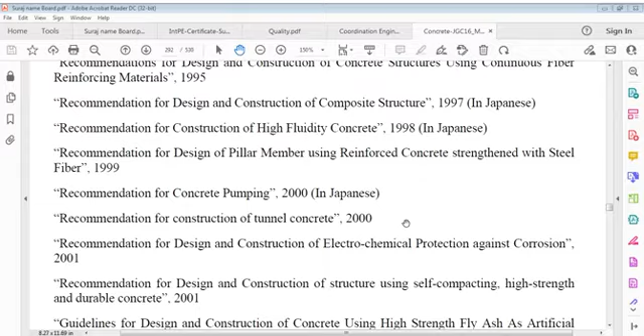Recommendations for construction of high fluidity concrete, then for expansive concrete, then using silica fume in concrete. For design and construction of concrete structures using continuous fiber reinforcing materials. Recommendation for design and construction of composite structures. Construction of high fluidity concrete, design of pillar members using reinforced concrete strengthened with steel fiber. That is design of pillar member.

Recommendations for concrete pumping and recommendations for tunnel concrete. Design and construction of electrochemical protection against corrosion. And then design and construction of structures using self-compacting, high strength and durable concrete. Guidelines for design and construction of concrete using high strength fly ash as artificial aggregate. And present problems concerning leaching of micro components from concrete.

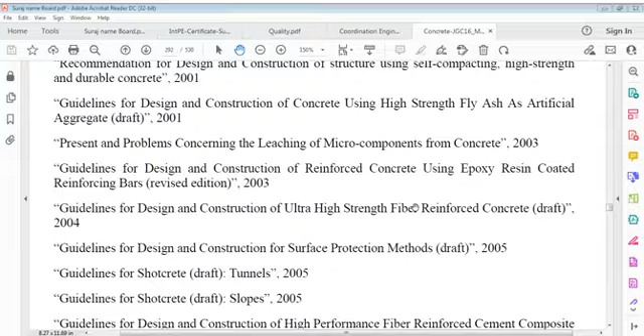And then guidelines for design and construction of reinforced concrete using epoxy coated reinforcing bars. Guidelines for design and construction of ultra high strength fiber reinforced concrete. For design and construction of surface protection methods, shotcrete tunnels, shotcrete slopes. Guidelines for design and construction of high performance fiber reinforced cement composite materials.

Constructing special concrete discussed in Materials and Construction. Special concrete frequently requires professional skills. It's stipulated that special concrete should be constructed under guidance of professional engineers with adequate knowledge and experience concerning specific types of special concrete. Acceptance tests for special concrete discussed in Materials and Construction shall be conducted either by contractor or owner according to type of concrete.

When acceptance tests for special concrete are conducted by contractor, owners require to verify results. Let's move further. Acceptance tests for special concrete discussed in this shall be conducted either by contractor or owner. When acceptance tests for special concrete are conducted by contractor, owner, or engineer verifies results of inspection.

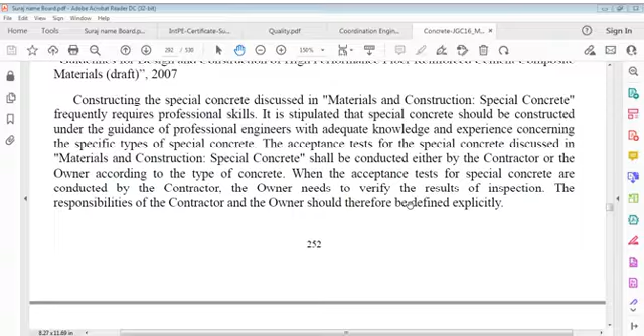Definition. Terms used in standard specification construction materials and construction special concrete are defined as follows. Expansive concrete, expansive admixture, chemical pre-stress, chemical pre-strain, shrinkage compensating concrete, chemical pre-stressing concrete, shrinkage compensated concrete, and lightweight aggregate.

Expansive concrete: a type of concrete to which an expansive admixture has been added as a mineral admixture. Expansive admixture: an admixture that is mixed with cement and water to generate ettringite or calcium hydroxide for causing concrete to expand. That's expansive concrete. Then chemical pre-stress: compressive stress that is applied to concrete when expansion of expansive concrete is restrained by such objects as reinforcing bars.

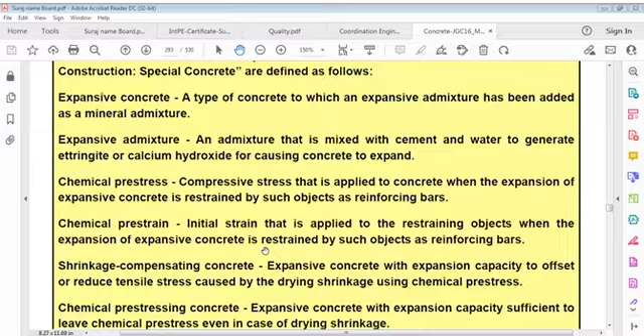Chemical pre-strain: initial strain that is applied to the restraining object when expansion of expansive concrete is restrained by such objects as reinforcing bars. Chemical pre-stress: compressive stress applied to concrete when expansion of expansive concrete is restrained by such objects as reinforcing bars. Shrinkage compensating concrete: expansive concrete with expansion capacity to offset or reduce tensile stress caused by drying shrinkage using chemical pre-stress.

Then chemical pre-stressing concrete: expansive concrete with expansion capacity sufficient to leave chemical pre-stress, even in case of drying shrinkage. Before that it was shrinkage compensating concrete, expansive concrete with expansion capacity to offset or reduce tensile stress caused by drying shrinkage using chemical pre-stress. The chemical pre-stressing concrete, expansive concrete with expansion capacity sufficient to leave chemical pre-stress even in case of drying shrinkage.

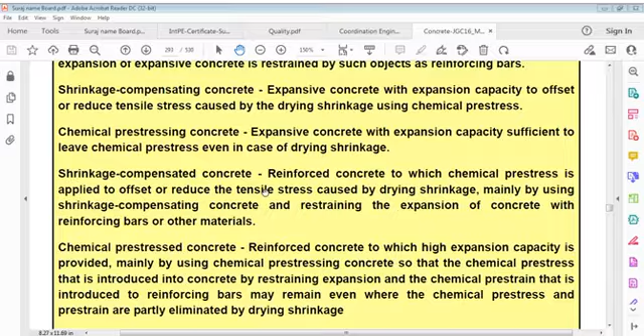Shrinkage compensated concrete: reinforced concrete to which chemical pre-stress is applied to offset or reduce tensile stress caused by drying shrinkage, mainly by using shrinkage compensating concrete and restraining expansion of concrete with reinforcing bars or other materials.

We'll take up this next time. This is a very long one. There's no way we can take it immediately. Now we go back to quality, concrete coordination, since we see time left. We're going to this sheet here.

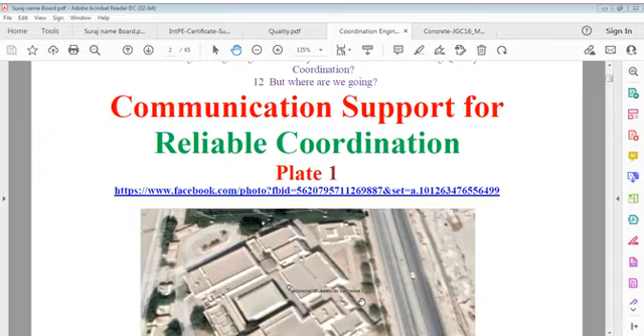Communication support for reliable coordination. Quality and coordination take a long way to understand and discuss, and it's very interesting to see how we can understand that. Communication support for reliable coordination. This is a plate here, a view of an ethylene plant. It's a kind of mega project with all disciplines, all branches of engineering involved. You may say it's something unique.